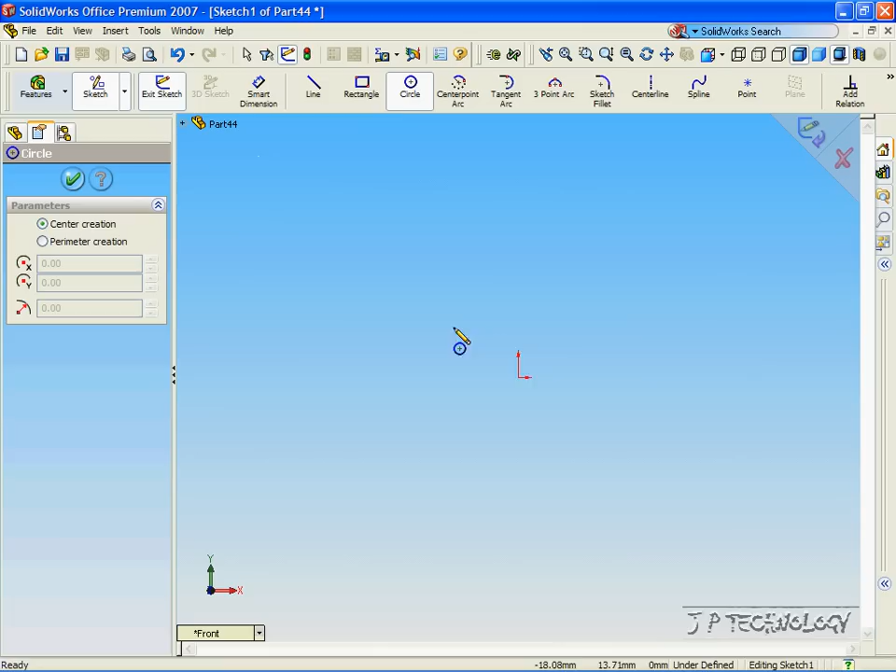To start off, click File, click New, click Part, click OK. Now let's sketch a circle and extrude it out. Click Circle, click Front, click on the origin and click a point outside of it. Let's make this 50 millimeters the radius. Click OK, click Feature, click Extrude Base, and let's extrude it out 20 millimeters. Click OK.

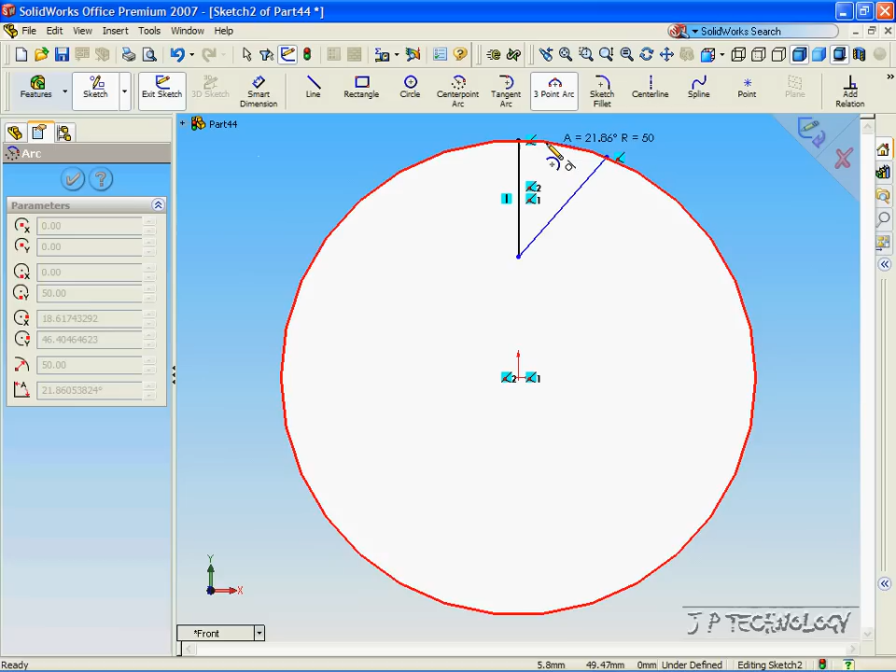Now let's look at the front view. Click the front face, click Sketch, click the line, and from the very top point, drag it down, click, then click the outside edge once it turns red. Now using the 3-point arc, let's close this sketch. Make the arc until the outside circle goes red, then click OK, and let's cut this feature out. Click Extrude Cut, and cut it out.

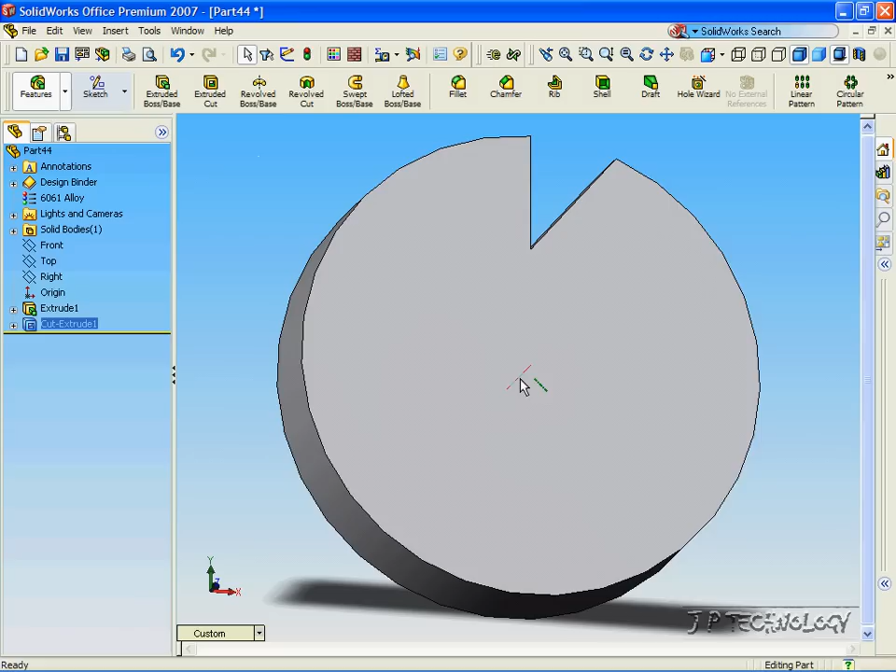Now to use the circular pattern, we need to have a feature that we want to use to pattern, and that's going to be the cut that we just made. We also need a temporary axis to revolve it around. So let's click View, click Temporary Axis, and now you can see in the middle, that little blue axis is

the temporary axis of the circle that we made. Now click Circular Pattern, click the axis in the middle, and now you can see that we have two parameters to play with again. We play with how many degrees are in between each feature and how many instances of the feature will go around.

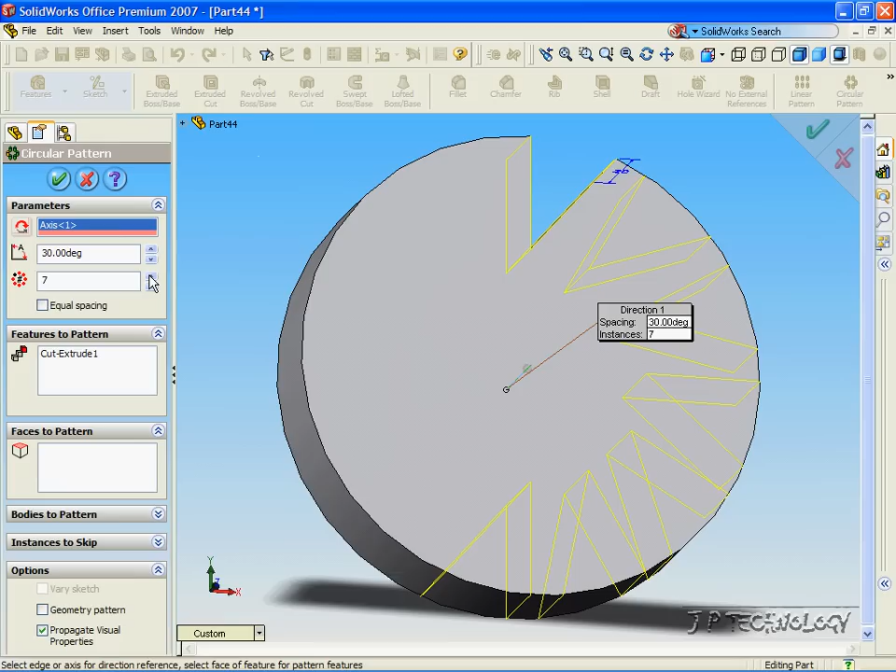So let's make this 60 degrees, and let's just have 5 features. Click OK, and now you can see how it cut out the 5 features.

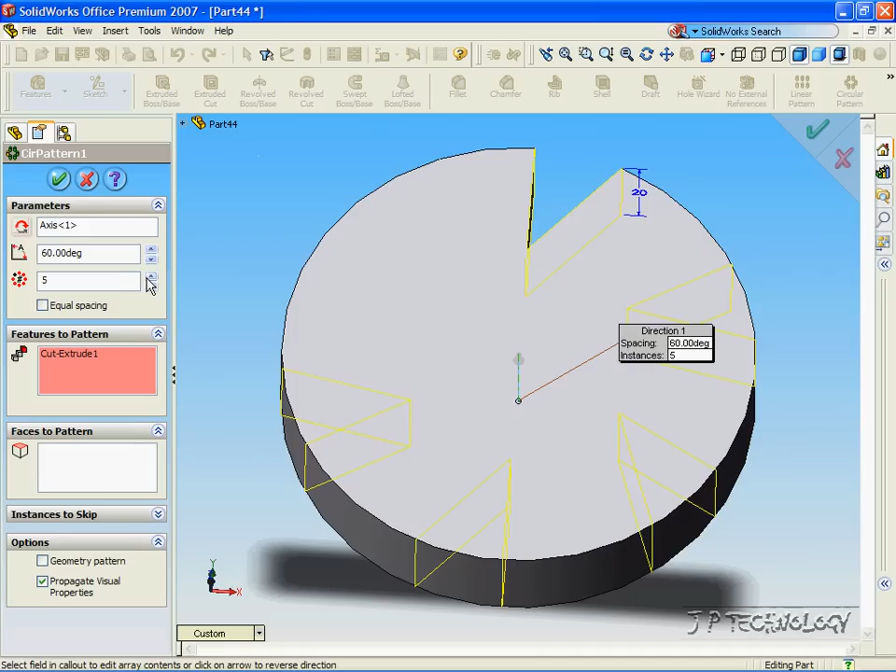Now, like the other features, you're able to right click on the circular pattern, click Edit Feature, and we can add an extra one in. So we can make it 6, click OK, and now we have 6 cuts.

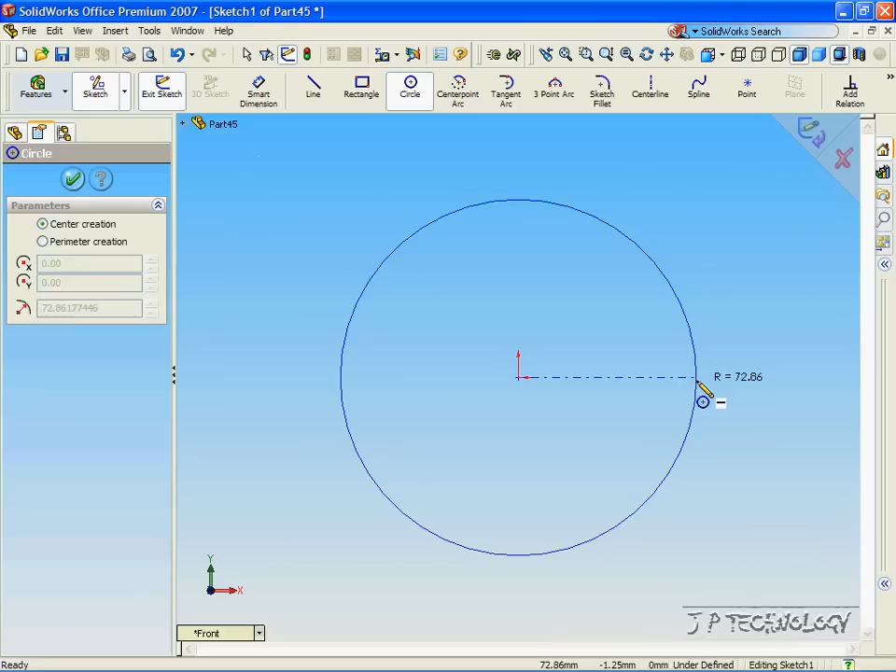Now let's open up a new part file, click File, click New, click Part, click OK, and I'm going to show you how to make a saw blade. Click Sketch, click Front, click Circle, click the origin, and we'll make this 50 millimeters also. Click OK, and let's extrude this out just 5 millimeters.

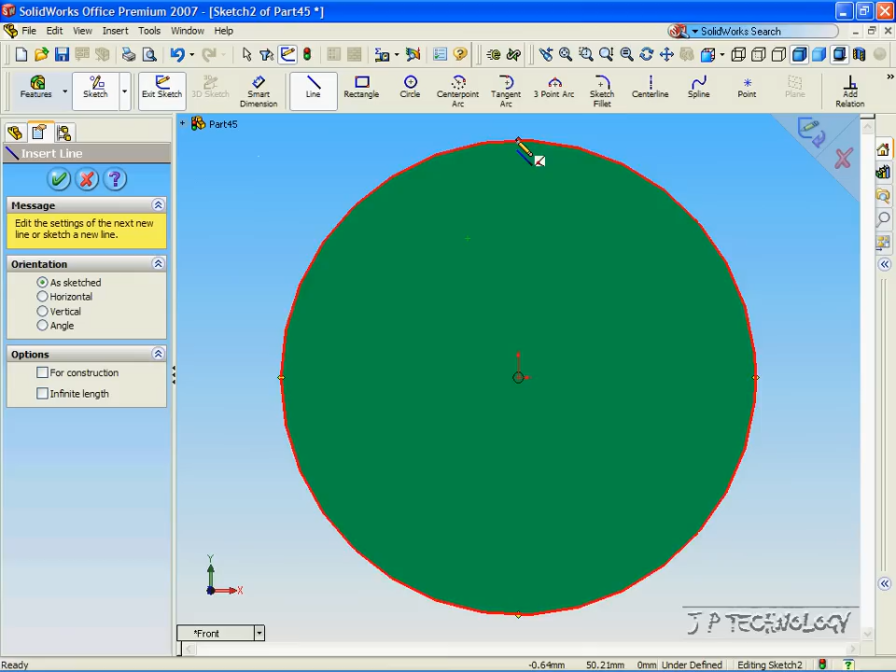Click OK. Click the front view, click the front face, click Sketch, click the line, and from the very top point, we'll come down just a bit, and we're going to go right out, and then close the sketch. Now click Edit Features, click Extrude Cut, and cut that feature out.

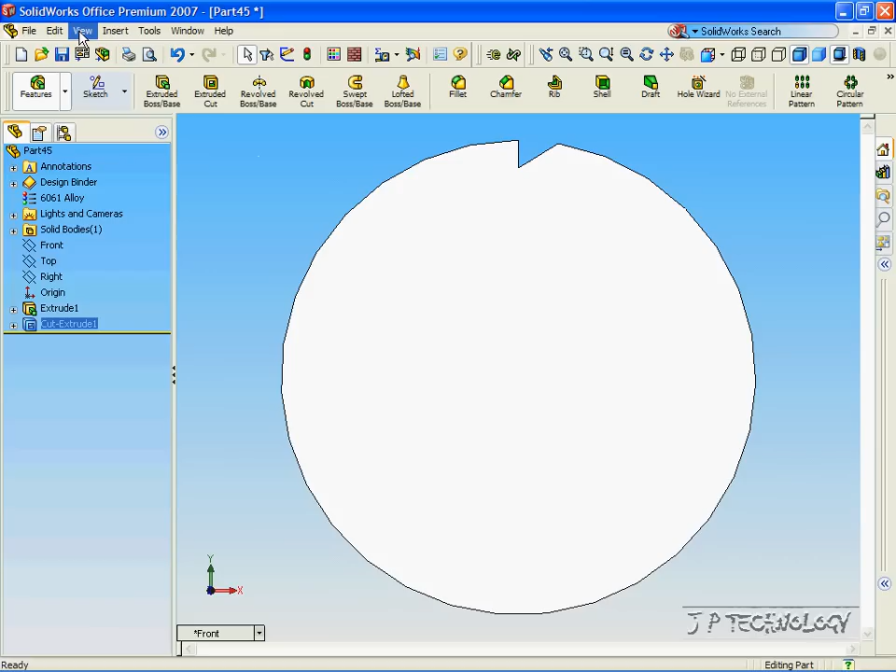Now we need to get our temporary axis in, so let's click View, Temporary Axis. So now our little temporary axis is back in. Click Circular Pattern, click the axis. Now click Features to Pattern, open up the tree, and click the Extrude Cut.

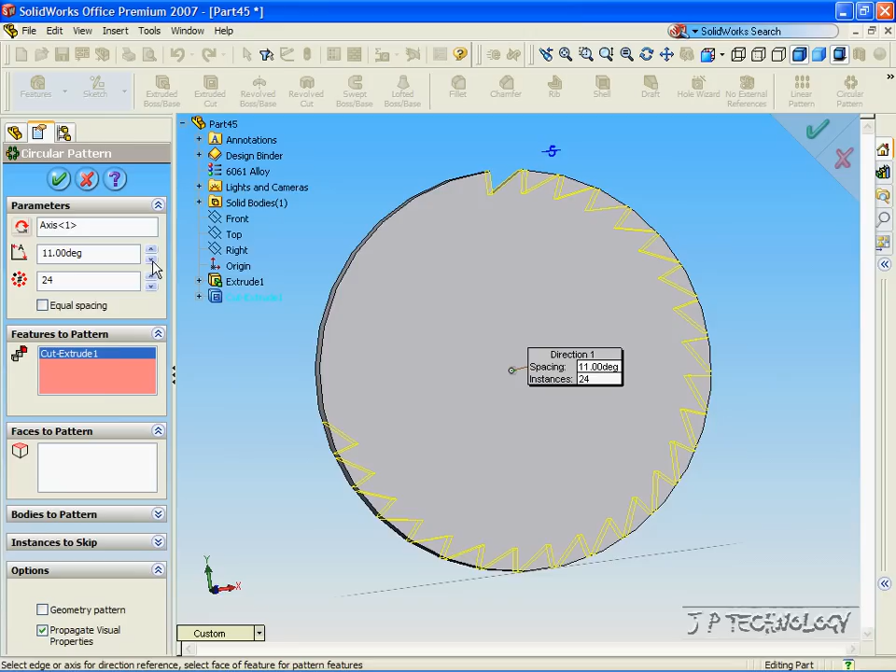Now let's add more cuts all the way around, and let's close the gap between each one. Let's make it 10 degrees, and we'll keep going until it revolves all the way around. So we have 10 degrees and 36 cuts. Click OK, and now we've made a little saw blade.

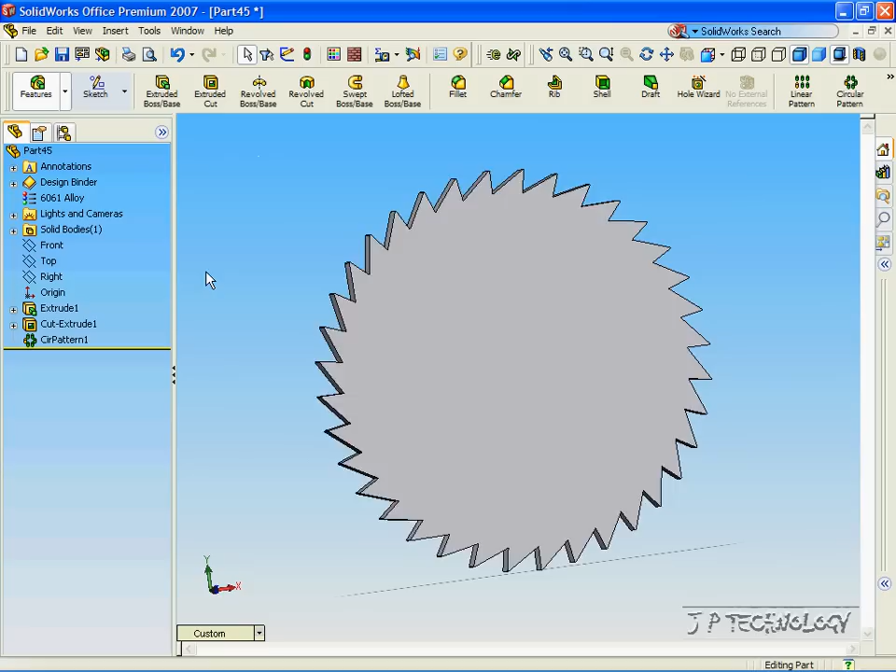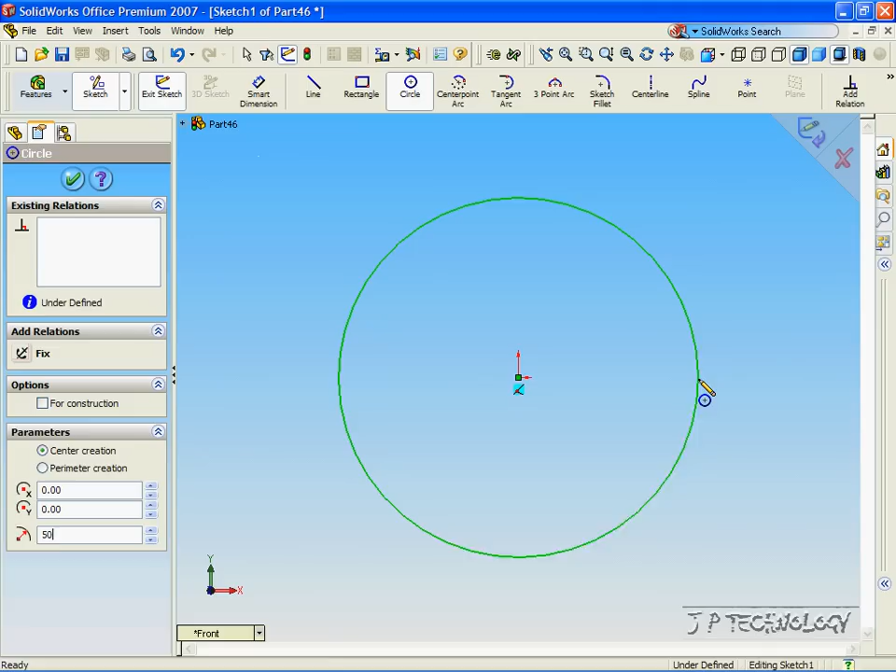Okay, now let's make another part file. Click File, click New, click Part, click OK. And now this time I'm going to show you how to make a gear. Click Sketch, click Circle, click the front plane, click the origin, and let's make it 50 millimeters again, the radius. Click OK, click Feature. Let's extrude this out 10 millimeters.

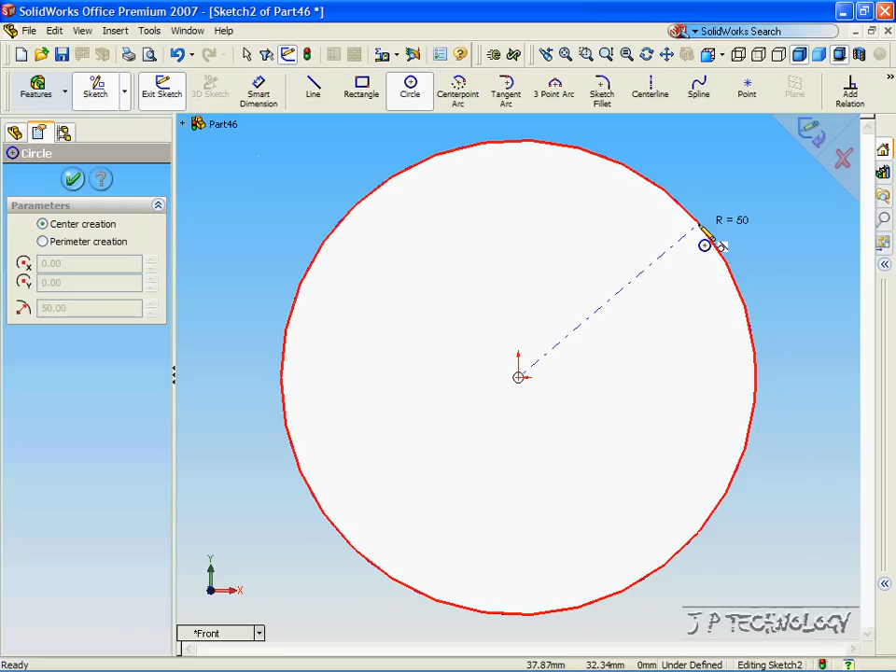Click the front view, click the front face. Now let's click sketch, and let's sketch a circle from the origin all the way out until it's red. And let's click the origin again, and let's make one with a 40mm radius. Click OK. Now click line, click the very top point, click the point on the second circle,

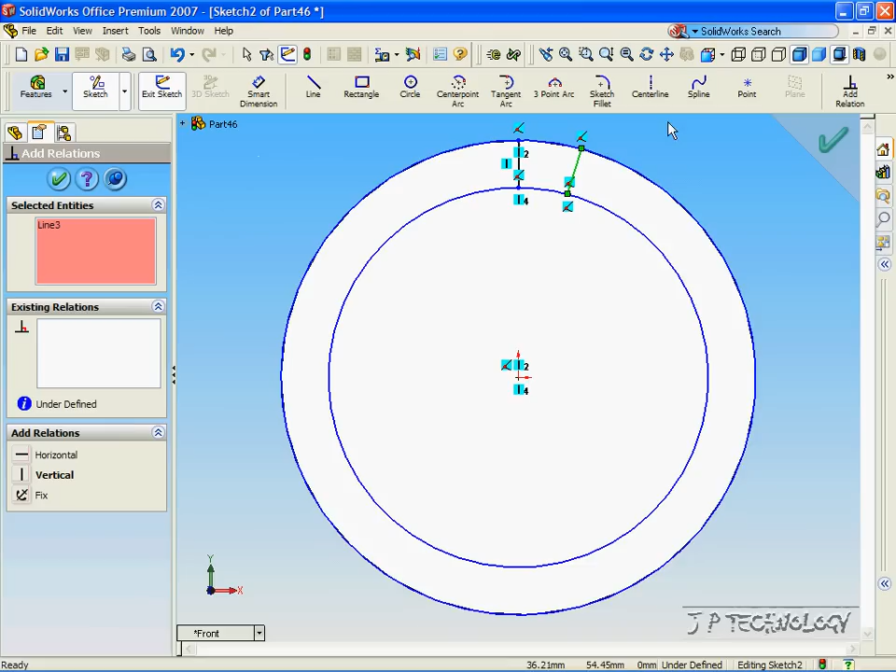click end chain. Now click a point on the inner circle and a point on the outer circle. Now with add relations, let's make those two lines equal. Click OK.

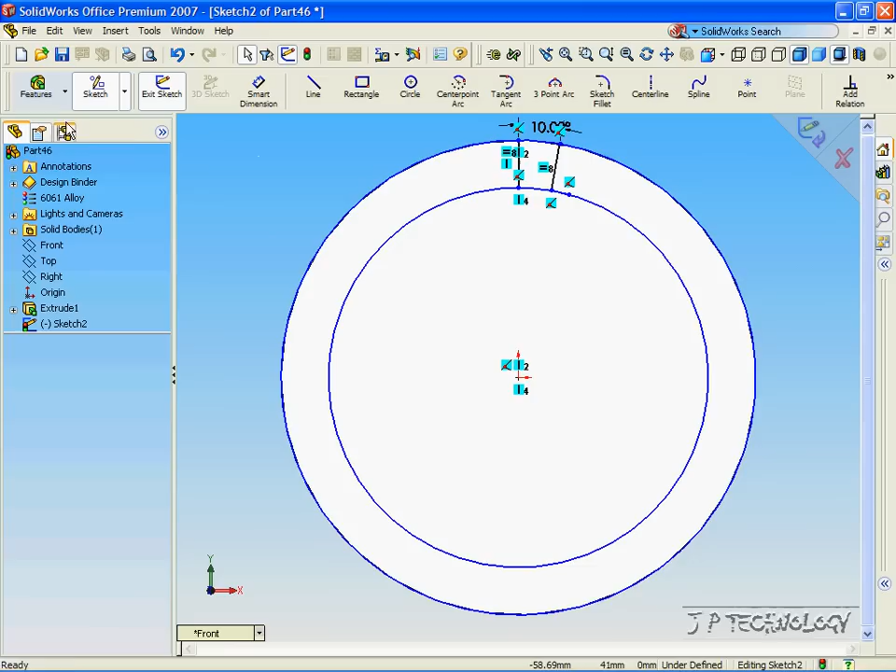Now with the smart dimension, let's make them a little bit closer. Click both lines. And the angle in between them, let's make it 10 degrees. Click OK. Now let's cut out that notch. Click Feature, click Extrude Cut.

Now, as you can see, there's a bunch of different closed sketches, so we need to choose which sketch we want to use. So this little notch, click that, and that's the one that we're going to extrude. Click OK. Now we've cut it out.

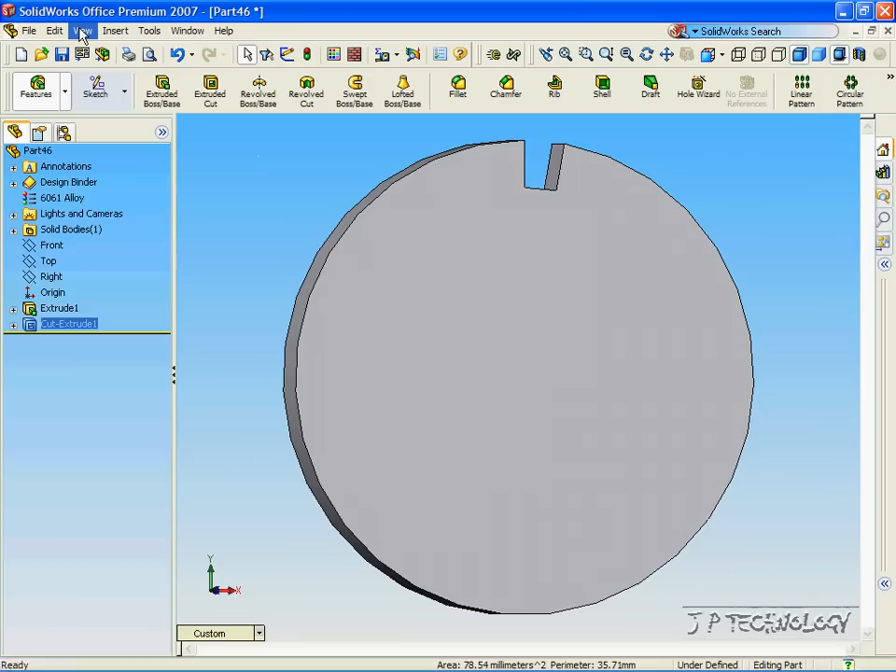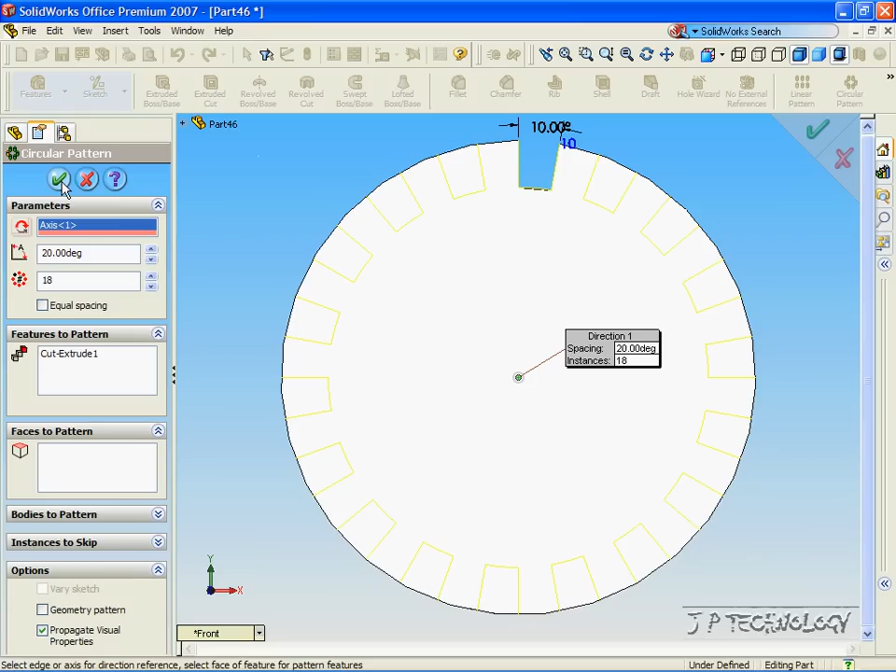Now let's view the temporary axis. Click the circular pattern. Click the temporary axis. And let's make it 20 degrees in between each one. And let's keep adding them until we go all the way around. Okay, that's good. Click OK. And now we've cut out the gears all the way around.

And that concludes our tutorial on the circular pattern feature in SolidWorks.